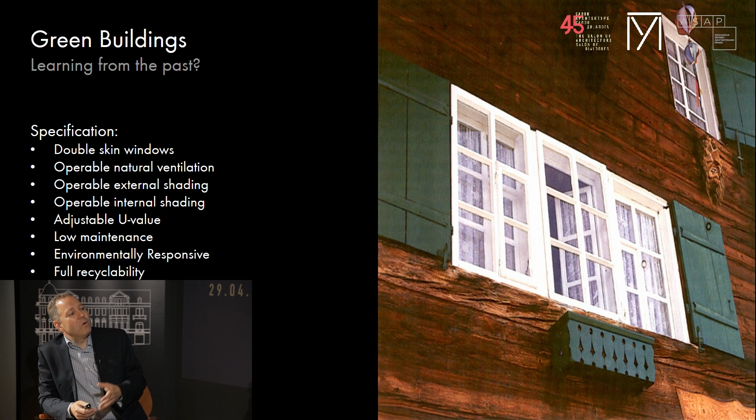You have low maintenance, relatively simple technology. It is environmentally responsive - it's all made of wood and simple glass. Almost full recyclability, at least of the metal parts, and biodegradable in terms of the wood. So if you put this specification down for a modern facade system, a lot of contractors would fail.

So it's a bit of a question - can we pick things, can we learn from the past? Also looking into the CO2 emissions from such a building - usually they had a kind of barn, or animals, usually in the basement or ground floor, then the living rooms or bedrooms above. So the heat from the animals, the cows, pigs, whatever they had, was going up - so it was natural heating. They were very smart in positioning - where's the barn, where are the people?

Now this whole building was run with one single stove in the center, so people were sitting around the stove. They just had one fire heating up, or more or less heating up - I mean, still not the thermal comfort that we would have nowadays. But this building was so environmentally friendly, I think nowadays we would struggle achieving that.

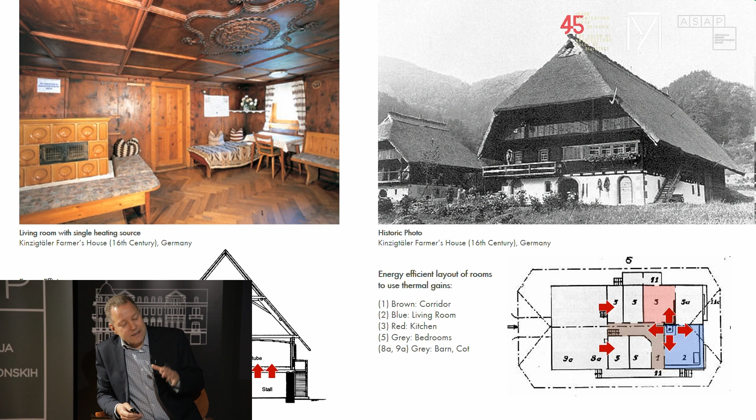Going from cold climates like Central Europe to hot climates, what did people do there in the past? Very similar approaches - it was about understanding nature, understanding physics. What can we do to enhance the thermal comfort of human beings? And this is quite key also for nowadays design - if we want to make things better, we need to understand how the human being works.

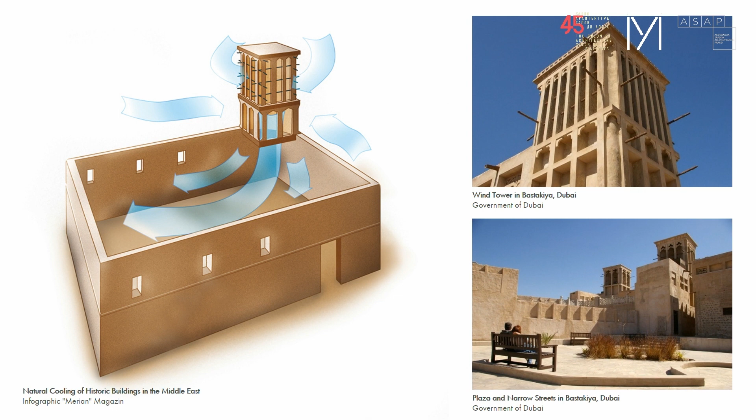And this is an example of the traditional wind towers that were built in the Middle East. During the summer it is extremely hot, so you're trying to harvest the wind, collecting it from a higher altitude, bringing it down into the traditional arabic courtyard, and this wind flow makes it at least a little bit more comfortable in terms of thermal comfort of the people. So low tech, built centuries ago.

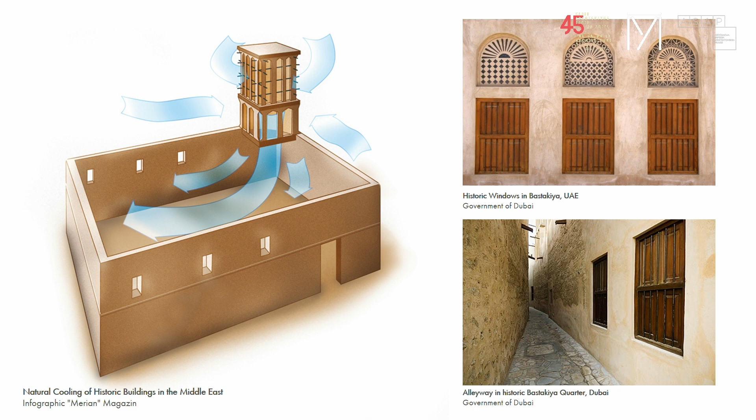Then also about shading - they didn't have glass in the past, so they did this kind of so-called mashrabiyah screens. These provided privacy and let air go through the screen, continuing this idea of wind flow. In the old Arabic cities, buildings were built very close next to each other so the pathways were shaded. It's also showing that people in the past had an understanding of how they can make the world a more comfortable environment.

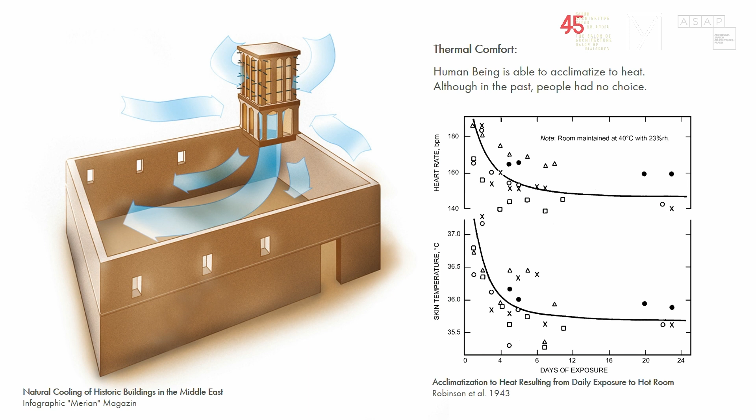There were some old local people from Saudi Arabia standing up and saying, oh, this sustainability, air conditioning is all modern, we didn't have it in the past. So people survived without air conditioning in hot climates in the past. How did it work? Nowadays people would complain immediately.

This kind of graph shows people were put by the US Army into a climate chamber, a big room, and the room was actually heated up. You can see on the left-hand side this is the skin temperature and the heart rate, and then the days of exposure. You can see that the first 4 to 6 days, people were stressed out - the heart rate was high, you were sweating.

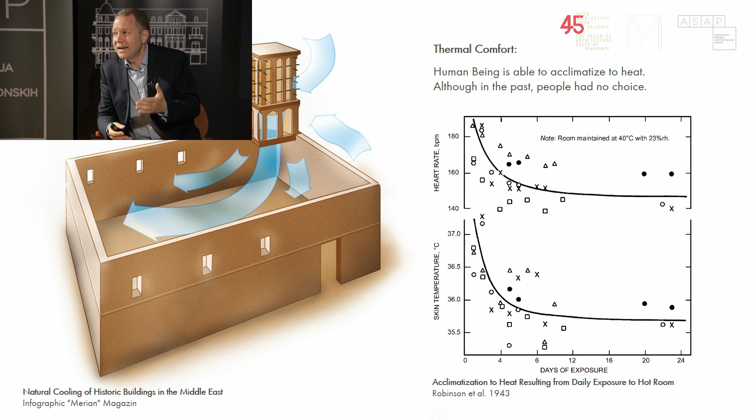But then human beings are able to acclimatize - your human body acclimatizes to high temperatures, the same also for cold temperatures. This is how people survived in the past, because you just have to pass through 4 to 6 days, and then your thermal comfort is getting better. But nowadays people are no longer willing to do it - people are sweating immediately.

Air conditioning in your car - you drive your car, oh it's hot, air conditioning, it's too cold, switch the heating on. So people in the past were more willing, or more used to withstand heat or cold, and this is quite important to understand. So we as human beings, we could go back to these kind of designs, but do we want to? This is another question, a bit more about our society.

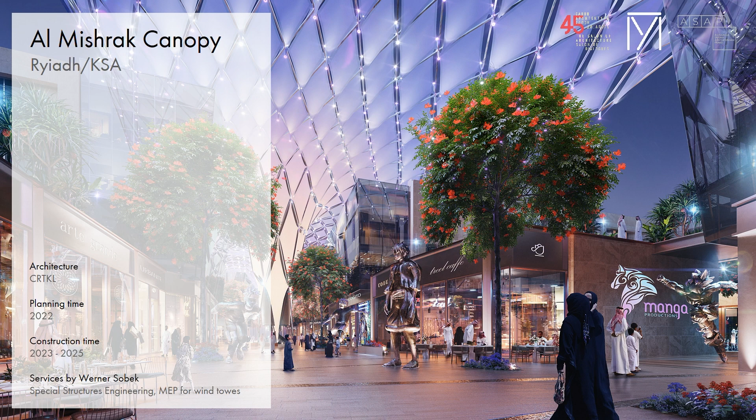Taking the steps further, learning from the old traditions - this is a project in Riyadh that we just finished the design on. In Saudi Arabia we see a lot of movements nowadays, building a lot of new houses, new cities, because the population is quickly growing. Now in these hot climates we try to achieve a more comfortable outdoor climate. This design involves a huge shading canopy with integrated wind towers to create an outdoor thermal comfort so that people can walk along the streets, even in the summer, more or less comfortably.

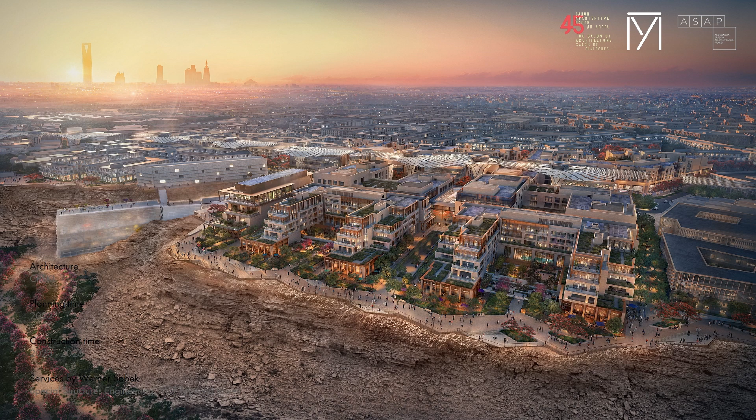You can see this whole design, so there's a complete new kind of city, or kind of half of a city that's built. Between the buildings, between all of the retail shops, houses and so on, we want to go away from this car society, because currently in the Middle East everybody's driving a car because it's hot. But if we achieve that, we're getting the buildings closer again, so that you don't need cars, and people are able to walk outdoors in a thermal environment that is comfortable, even in the summer, with less sweating - then we achieved quite a lot.

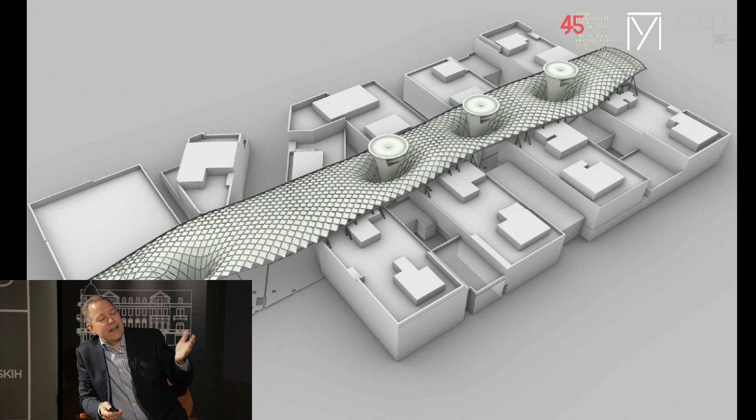So this design involves wind towers which are cantilevering out from the ground, getting wider at the top, collecting the wind from the two main wind directions and funneling this wind down. At the same time we have this kind of shading canopy to provide shading. In terms of design, we designed this kind of big grid shell structure between the buildings, supported on the buildings.

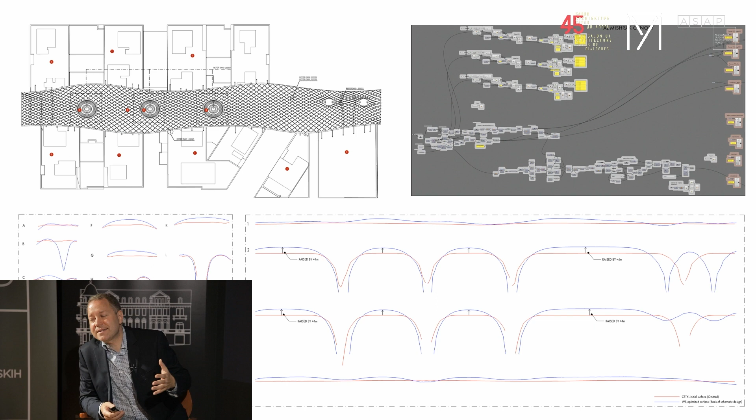Going to the next slide, it shows a bit of the technical complexity behind these kinds of things. If we do design nowadays, especially for so-called freeform structures or these kinds of shapes, we optimize them first architecturally - the architect has to say how the geometry looks. But then we also want to build an ideal grid shell structure, ideal arches, so we modify the geometry for structurally optimized geometry. All of this is run in parametric scripts, so we're fully working in Grasshopper with Rhino, because otherwise you cannot design these structures in 2D.

We call this approach CAD to CAM, computer-aided design to computer-aided manufacturing. This involves that nowadays we even pass on the 3D models from the designers, the architects, the consultants, to the contractor.

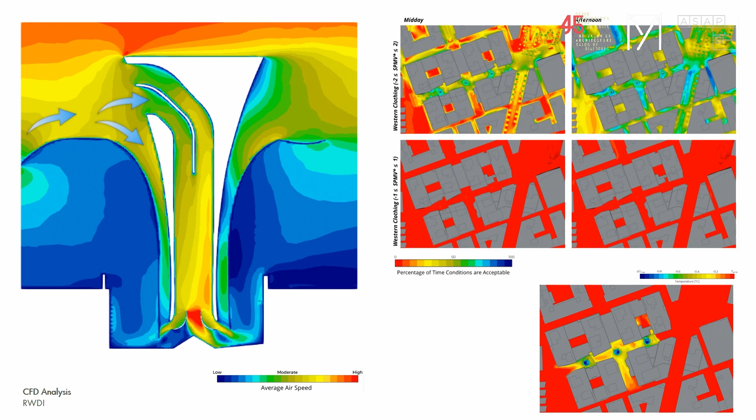Now, I was talking about the wind towers, and what people in the past were able to assess by simple things, just putting the finger in the air to know the main wind direction is from this side, usually from the sea. Nowadays, we have to use so-called CFD analysis, computational fluid dynamics. These wind towers have two openings, collecting air from the main wind direction and funneling it down. The red areas are areas of high wind velocity. On the right-hand side, you can see the percentage of time when exterior environment conditions are acceptable to human beings. We did certain studies with the help of a CFD consultant to see at which times of year we are enhancing the outdoor thermal climate.

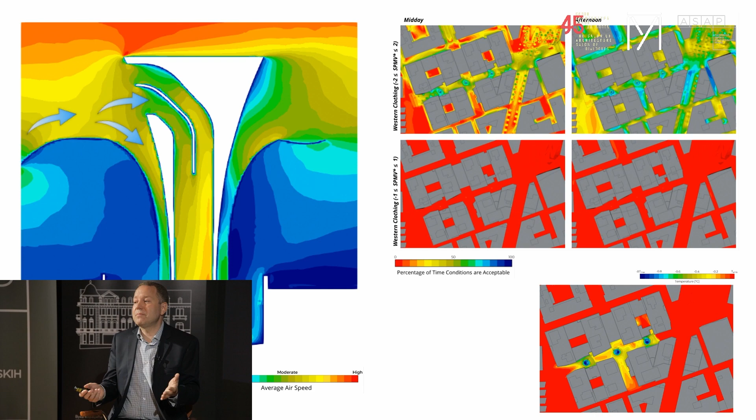You have to be realistic. You cannot achieve that the whole summer in the Middle East gets nice with these kinds of things, but we are actually enhancing it.

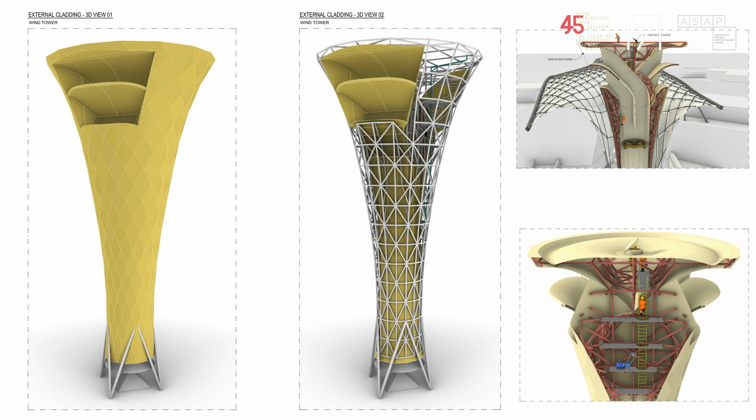At the same time, we have water spray systems included in these wind towers, using so-called evaporative cooling. We spray water mists into the airflow, and the natural effect of this evaporation cools the air down. It also slightly increases the humidity levels of the air, but it's working.

This project shows a bit of the whole design. In the middle, this is the MEP system of the air fans, the air intake, the air exhaust. At the top right corner, this is a kind of rotating drum. As I mentioned, we know two main wind directions, and when the other direction comes, we have to rotate the drum.

This involves that we need to scratch our head because all of this is unique - no one built it before. This is where we as a structural engineering team step in, take on the challenge, and design these unique things. We designed all of the mechanical parts, this rotating drum, the mechanical equipment, the steel structure, so that we were able to pass on the full design to a contractor to build it.

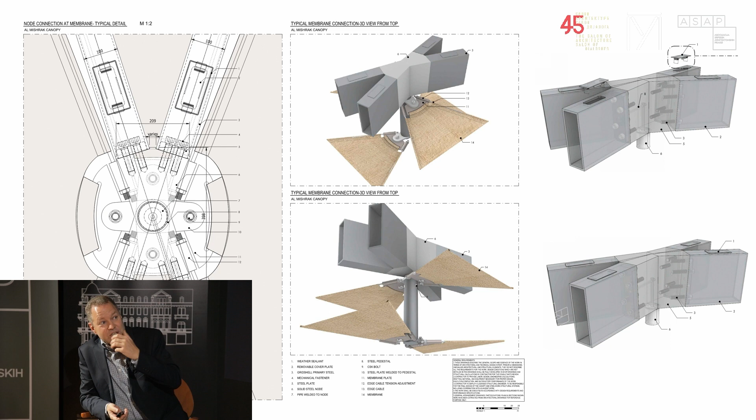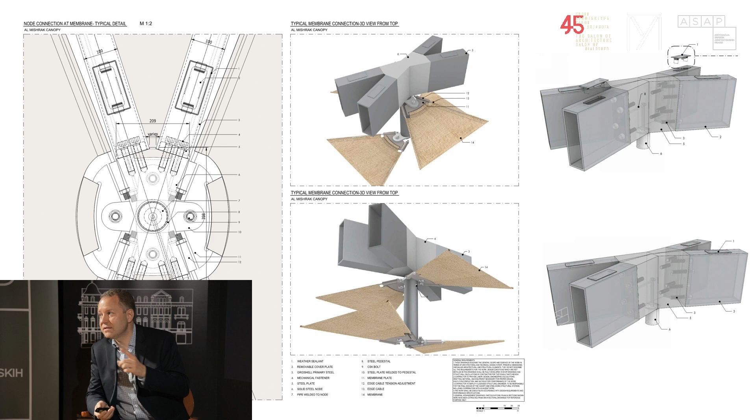Talking about the shading, as I mentioned, it's a shading structure. Usually our grid shells need to be lightweight because we're talking about big structural spans. This grid shell has a span of over 60 meters, clear span, realized with a steel box section of 300 millimeter height. So the span to structural height ratio is amazing, but to achieve this, we need to be efficient.

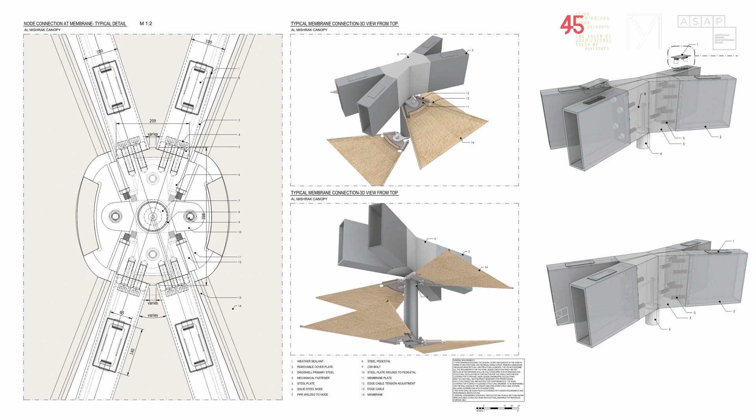We need to be efficient first in terms of weight of the materials, and the most efficient materials are tensile structures. So we used fabric, stretched fabrics, tensile cables to achieve the shading. At the same time, we optimized the geometry to achieve a perfect arch, which was already done by the Romans. We then designed a so-called grid shell system with nodal points that take on all of the different angles, which are CNC machined - you can see it on the right-hand side, showing one of these typical nodal points of the grid shell structure. This is then all bolted together.

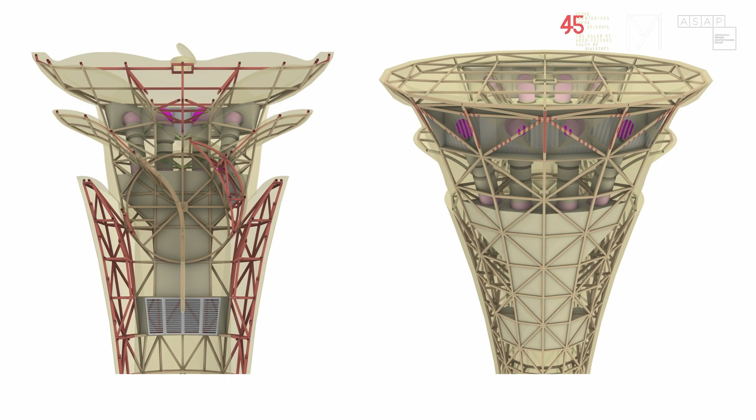These kinds of systems, for us, are a step forward. We're combining old design ideas with very modern technology, doing it at a bigger scale, and trying to enhance the world, make it a better place for people to live. If they want to walk out in May or June in summer, it's still a nice climate, or more or less, and people can sit outside.

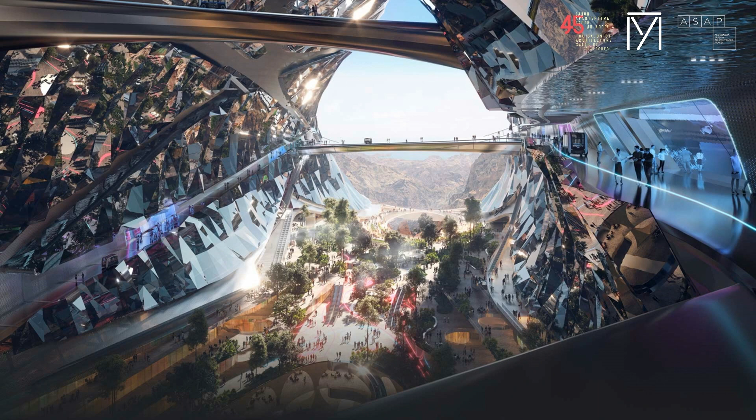Talking about Middle East projects brings me to my next project. We're currently the facade consultant on the Neom Trojena Vault project. A lot of you might know the Neom development in KSA, Saudi Arabia, a fast developing country with a growing population. This Neom Trojena Vault is a project at 2,000 meters height, and we're currently involved in this so-called Vault project.

The Neom Trojena development is on top of the mountains. They were winning the Asian Winter Games, so they're going to host winter games in this area. They also have snow for certain days, so it gets cold there.

The background is the following: this is intended as a kind of destination. As I mentioned, during summer it's quite hot, but at 2,000 meters height it's about 10 to 15 degrees less because of the elevation. So just by the location, you're achieving better outdoor thermal comfort, and you also require less cooling load because you're 10 to 15 degrees cooler than at sea level.

Now the whole design for the Vault includes building almost half of a city into a mountain. Usually mountains give some thermal mass—it's a bit similar to sitting inside a very old building, like an old church, where the walls are like 2 meters thick. During summer it still feels cold because of this big thermal mass. It's a similar approach here, where the mountain helps cool down the interior space.

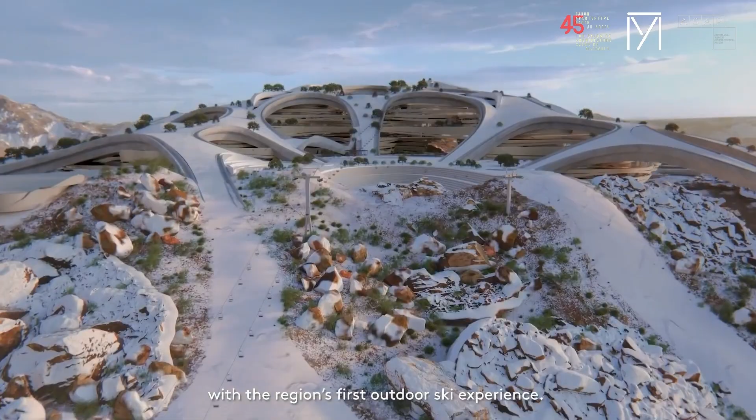Journey to new heights, a unique global destination driven by cutting-edge technology in Neom. This is Trojena. Breathtaking architecture and innovative engineering fold seamlessly into the natural landscape, ascending to a vertical village, a portal connecting the digital and the physical. The seasonal climate provides a multitude of high-altitude adventures in the Arabian Peninsula, with the region's first outdoor ski experience. Enjoy the buzz of world-class entertainment, the crisp mountain air, and the world's most advanced health and well-being center, nourishing both body and soul. And as night falls, you can witness the stars as you've never seen them before.

Welcome to Trojena. Now, on these Neom projects, we know architects involved. We're currently involved in this Neom Trojena project. The project itself has extremely high sustainability goals, which is achieved by a multitude of certain measures.

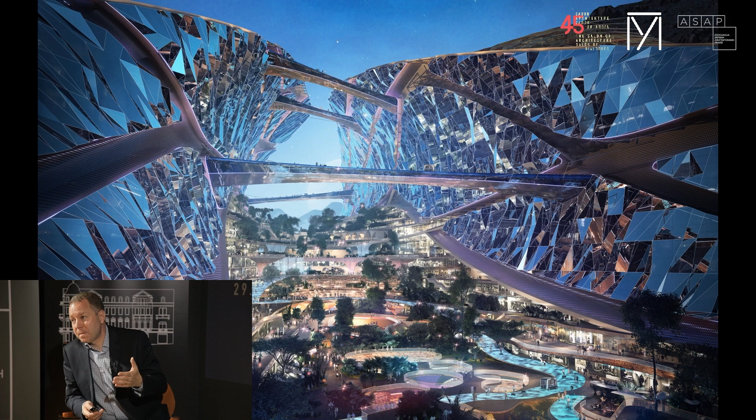Now, this is the so-called vault facade. You can see that our facade curves in from both sides, which on both sides is then facing the rock. At the top, we have a big roof, which is covered partially with PV panels. The central void area already achieves a high degree of shading. We achieve a high degree of natural airflow through this void because it is open at both ends. It's even at the top of a mountain.

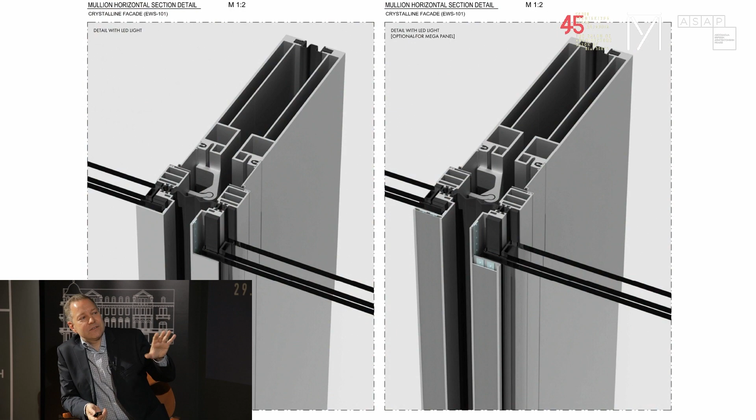This shows a bit of how we go into the details. So this is a typical facade system, which, if you look back to this slide, has a lot of unique different angles. So getting this technically feasible, getting this built, getting the design out, getting contractors bidding for this job is quite a challenge.

Now, as I mentioned before, in terms of the design of this project, it's almost half carved into the mountains. You can see on the left and right hand, we see the mountains. We then see so-called back of house, it even includes gardens. There's a goal that we include gardens, that we harvest crops over there, with some salad, lettuce intentions there. And the rocks by themselves emit cold because it's a big, big thermal mass.

Then the roof itself provides shading, but also includes PV panels, or photovoltaic panels. So we want to generate a certain percentage of the electrical demand by ourselves within this kind of building.

The vault project will be the main transportation hub for the Trojena development. So all of the cars will go there. There's a tunnel going to this building. And there's a kind of pathway down to the lake, which is also green and so on. It's quite a unique, quite a stunning project.

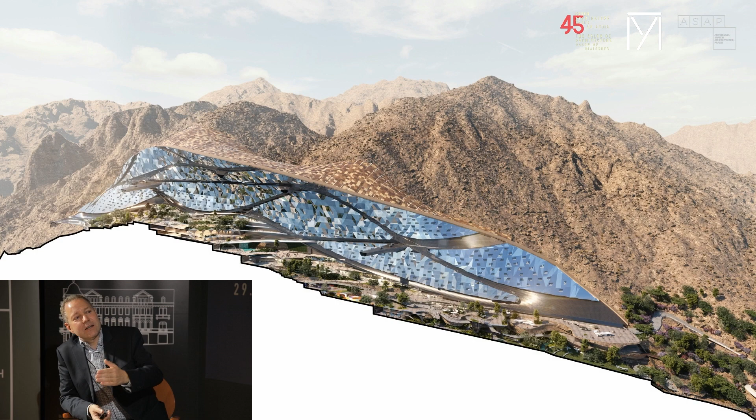This is now a longitudinal section through the project. You can see the kind of scale. It is massive. So from the top, the project is actually intended to mimic the rock so that the architectural impact, the visual impact, is less.

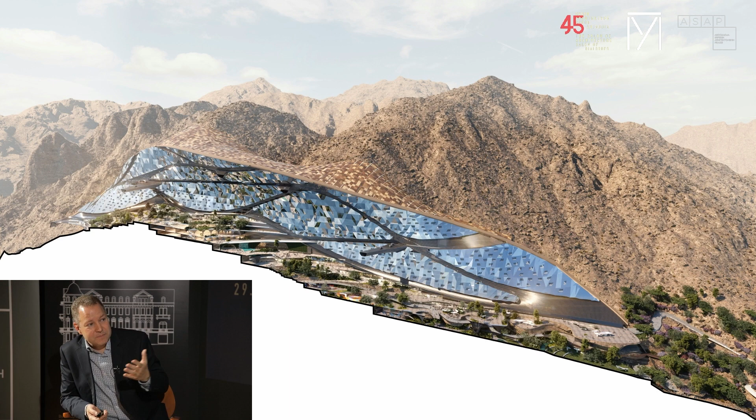It shows, how shall I put it, new ideas of how we can develop more sustainable cities. And it's not starting with small steps, it's starting with big steps. We are starting doing something completely different. For example, carving half a city into a mountain.

Okay, another project currently in the press, called the Mukaab in Riyadh, another landmark project in Saudi Arabia. The intention is to build a 400 by 400 by 400 meter cube, a box. It will be the world's biggest building, even bigger than the Pentagon. The idea is that inside this 400 by 400 by 400 meter box building, we're building another building, a kind of tower, which is 330 meters in height. Around this interior tower, there's a plan to have the world's biggest video projection area.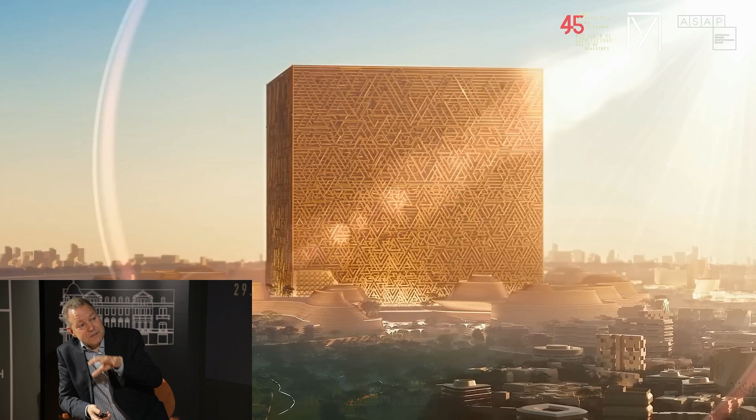Now, the whole development is the center point of a whole new city development called the Mukaab. The project itself is also one of these completely new ideas. In the end, if we talk about sustainability, how can we design a sustainable building, both in hot and cold climates? It starts with very simple things.

It starts with the A-to-V ratio, we call it. So what is the external surface area, the building envelope? For example, if you take this as a box, we have the sides, the top - that's the kind of envelope. And then we have the volume of the building. A building is more efficient the better the A-to-V value is. For example, the best shape is a ball, or a circle, a kind of box building.

But if you build a flat building, it's usually pretty bad, because you need to cool down this interior space. And the less surface area you have, the less facade and roof area you have, the easier it is, because the facade and roof have a poor U value. So all of the heat gain or heat loss is through your building envelope. And if you minimize the building envelope area compared to the volume of the building, then it gets efficient. That's why a single-story building is usually not efficient - you want to put some floors on top, because then you get a box which is more efficient.

It's a similar idea here. We're creating a massive interior volume, which means we also need to cool it down less because the solar heat gain is less, and the surface area of the building envelope where heat loss or heat gain takes place is also less.

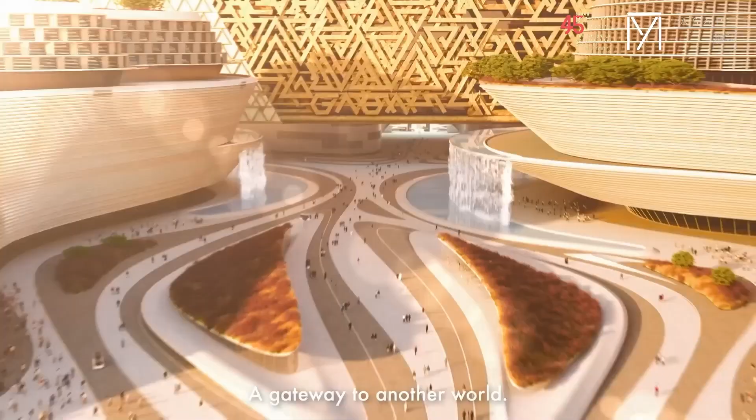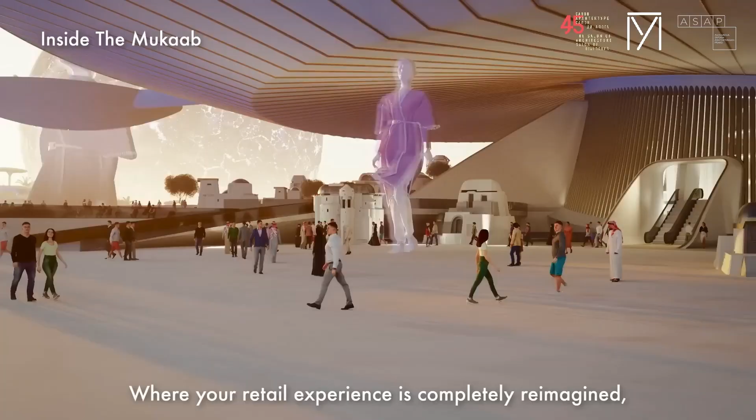Step inside and it's unlike anything you've ever seen, at a scale that's unprecedented, big enough to hold 20 Empire State Buildings. Where you and those around you enter a new reality, transporting you to Mars one day and magical worlds the next. Where your retail experience is completely reimagined, and hospitality, leisure, and entertainment reach new levels, all in breathtaking, ever-changing environments. This is the new face of Riyadh. Experience a new horizon.

So let me go back one slide to explain the technical challenges here. First of all, we're building a structure made of 4 corner towers, which are already 400 meters in height. We're then building a big roof on top, which includes, I think, a car racetrack.

We then have one facade on the exterior skin with a mashrabiya to provide shading. We then have the inner skin, which is the video projection area, which of course has to be almost seamless. It's a question of how we support it and what it's made of. Most likely it's a membrane structure. So there's a lot of questions, a lot of new design approaches we have to take for these kinds of projects. It's quite challenging.

We're going to see how it develops. Now going on to some projects currently on site, we're currently the lead consultant for the Wasl Tower in Dubai.

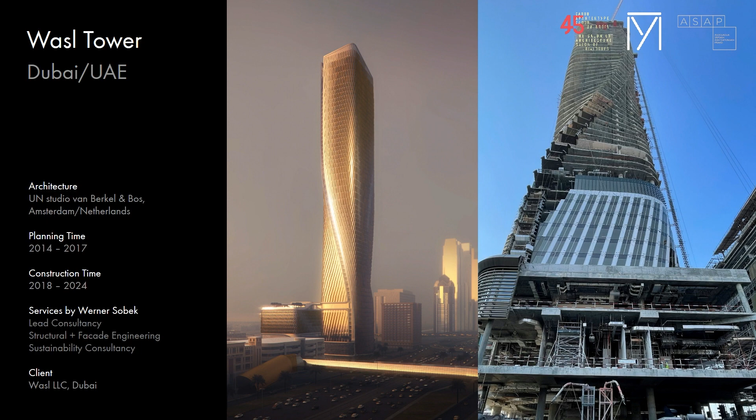So coming to a bit more traditional design, this tower is going to be the world's tallest tower using a ceramic facade, including terracotta. Terracotta is a very old traditional material, like porcelain, invented by the Chinese ages ago, and this is going to be the cladding for the exterior sunshade elements on this tower.

Talking about the challenges, this is one of our first projects fully developed in 3D together with the architects from UN Studio. We spent a lot of time designing the right amount of exterior solar shading in combination with the glass, which has a solar control coating. It's a combination of measures to reduce the solar heat gain, which is the main factor in cooling loads in the Middle East.

I want to go on to some other projects from the last years. We've been the lead consultant for all of the shading structures for Expo 2020 in Dubai. We were the engineers but also the architects for these retractable shades, the so-called flying bird shades, and also for some green, natural plant shading.

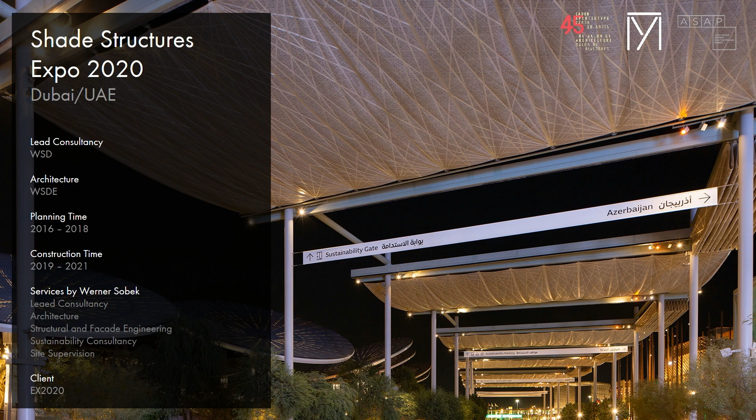As I said, a similar idea to our project in Riyadh but with a different approach. For the Expo, you have a lot of these pavilion buildings and people walk between them, so it was a major task to create a comfortable outdoor thermal environment for people walking between the pavilions. At the same time, there was a clear intention by the client that during night times you want to see the stars, so we had to design something active, where the shading can be open or closed.

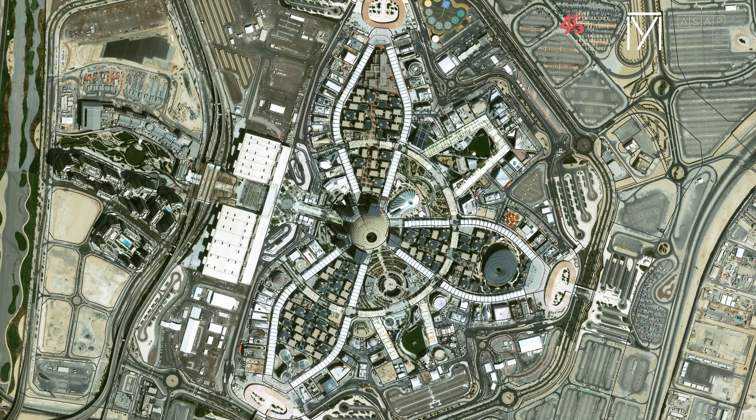This is the design we came up with. You can see the scale here - the white areas are all the shading membranes, and all of the dots are the buildings. It's a massive scale, a huge development - it's an expo. All of the shades are retractable, so during night times they were closed or partially opened with lights on.

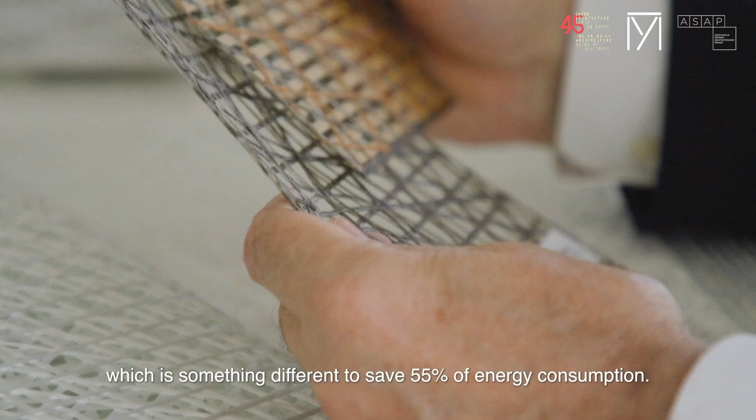In terms of the design of these, I have one video from Professor Werner Sobek, on how we have to reduce emissions dramatically. The announcement is to reduce CO2 and greenhouse gas emissions within 10 years by 55%, which is different from saving 55% of energy consumption - this is even more difficult to achieve.

Everyone underwrites that, but nobody really makes clear to himself what that means. Because if we are not capable to change the technologies we use to produce the materials, to build the buildings, to run the buildings, and to demolish them, then in 10 years we are allowed to build only 45% of the amount we are actually building. That means half of us would become unemployed.

Standing in front of a problem which says either you change everything or you cannot build in the way you build nowadays will urge this interdisciplinary process, where people start talking to each other and say either we invent something or we are lost.

Now, talking about sustainability is also about the amount of material that we use. To create shading, for example, you can do this as a concrete slab. But what's much more efficient is to minimize the design, take a minimalistic approach, and save material. These shading fabrics are only 2 or 3 millimeters thin, so in terms of material used and weight, it's almost nothing.

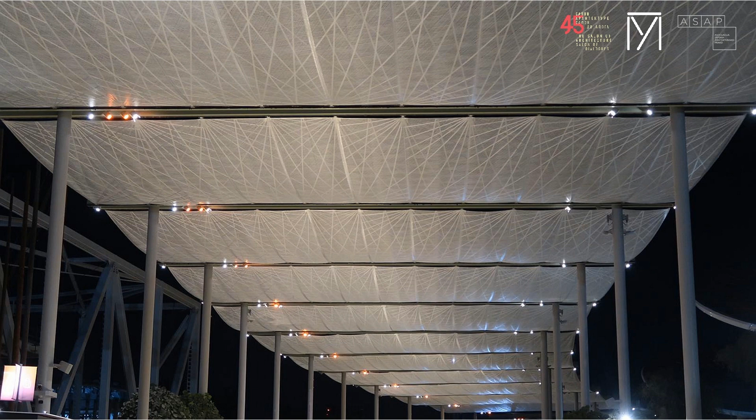At the same time, what you can see here is the orientation of the fibers. And this is now the closed position. Talking about the orientation of these fibers, we collaborated with a company in Italy on the design of these fabrics.

We have the main points where the fabrics hang from the steel frame on tracks. These points are the points of stress concentration, and we orientate the fibers in a direction toward the next support point. So we're designing a fabric that is perfectly designed for minimalistic material, and at the same time it gets an architectural quality because we are visualizing the main stress directions, which a lot of people say looks good. I'm not an architect, but hopefully a lot of you will share my point of view.

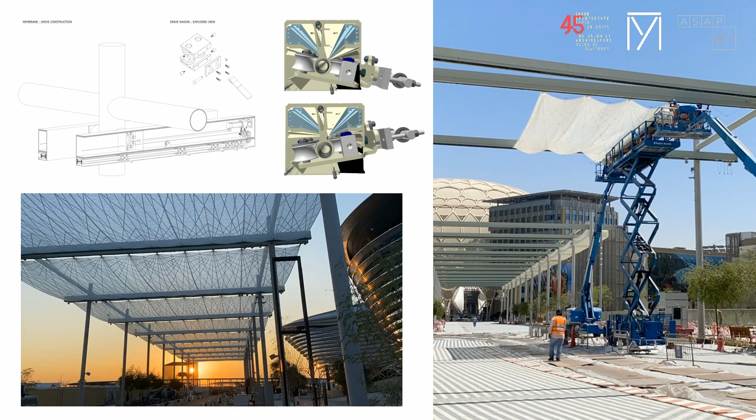Now, going on about the technology, of course we had to design all of the tracks, all of the mechanical equipment, all the motors, the rails, the gear, and so on.

The expo took a bit longer than expected because of COVID. It started late and ran longer, and these fabrics are still in operation nowadays. They were designed as a temporary structure, but now they've been running for almost 3 years. We're quite happy with the project, it worked out really well, and people tend to like it.

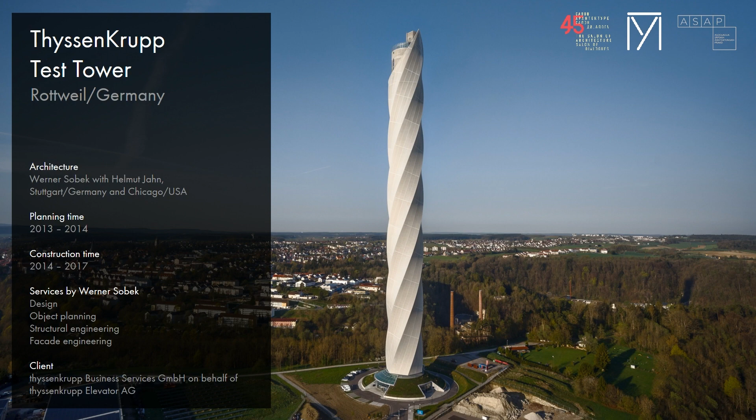Now, talking about fabrics itself, this is maybe a bit of a future trend we see, that we will build more with lightweight, translucent materials in the future. Why? Because we want to save material, we want to go to new shapes. Architecture is moving toward more complex curved geometries. If we want to create curved geometries with traditional materials like flat aluminum panels or concrete, it's really difficult. Fabrics, you can easily stretch in the way you want.

So this is the ThyssenKrupp Test Tower, an elevator test tower, which is the world's tallest fabric facade built so far.

In the end, it's quite a boring building because it's just a concrete core with test elevators, and we had to clad it in a nice way. Otherwise, I think the local government wouldn't have accepted this tower.

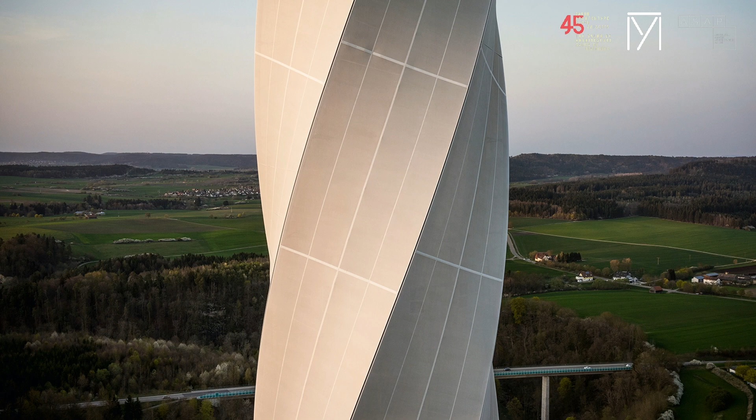But it shows a bit of the beauty of this material. In the summer and winter, it picks up the light, picks up the shadow. It's even translucent, so if you look against the sun, you can see through the fabric. This whole design with fabrics is amazing because it gives you the opportunity to create something that's translucent and could also be permeable. The whole idea of permeable systems—systems that let air pass through, provide shading, provide privacy—ideally also has a certain thermal performance.

This slide shows some research, because we are closely collaborating with the University of Stuttgart, with the ILEK. This is currently a research project by the ILEK. It's about a kind of tilement, I would call it—a lightweight facade system which uses microfibers in a kind of mesh with a certain density.

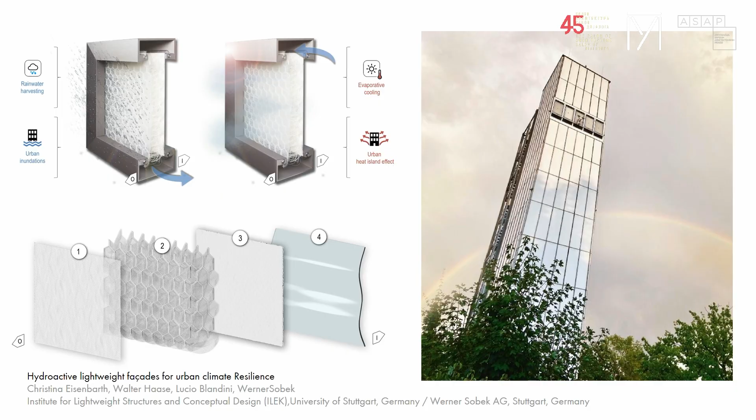Then you spray water, or let water run through the small fibers from top to bottom. At the same time, if there's strong rain, the system can harvest the rain. So there are different layers of the system, and the next slide shows the main principle.

This system is a bit similar to what I showed previously with the Al-Mishra canopy in Riyadh, with the wind towers where I had a water spray system. It's about evaporative cooling—using just water to cool air down. It's a similar kind of system, but we're not using a mechanical system, just water which runs down on these microfibers.

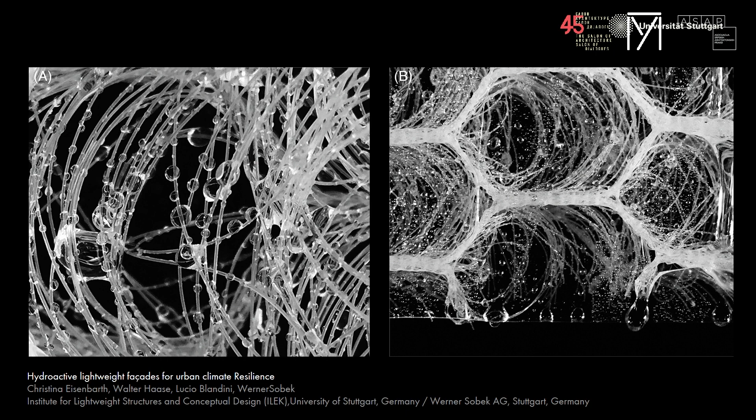This is a close-up micro photo of these microfibers. They're extremely small. The tiny water drops start sticking to these microfibers, so you let the water run onto them and they easily evaporate into the air. You're getting evaporative cooling by the natural airflow through this open material.

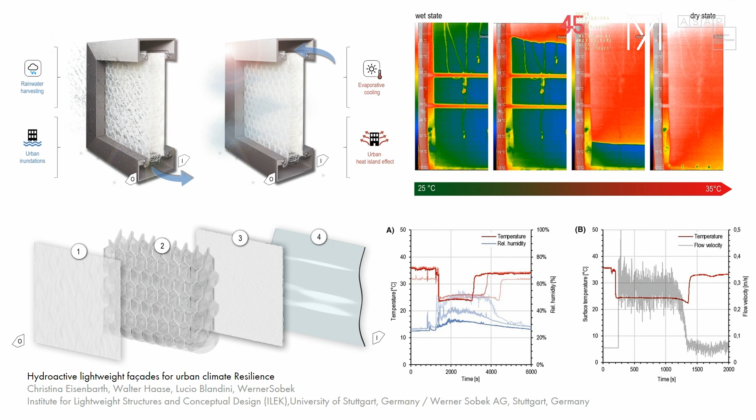You can see that we're able to cool down the air by about 10 degrees Celsius with this relatively simple system, just using water and natural airflow—no electricity, no compressor, no mechanical system, quite simple. This is a way forward. Our future might be a combination of very complex systems, as on NEOM, but also maybe very simplistic systems like these. It's about getting the ideas out there, doing the testing. All of this starts with understanding the physical principles, understanding how we can make this world more comfortable for human beings, and how a human being works.

This brings me to my next topic, which I'm currently researching quite a lot: human-centric design. Most of the slides I've shown before were human-centric, but now it's about light. This is a photo from 1920 in the UK, where babies were put out in the sun. Why did they put babies in the sun? Because they figured out that if a human being lacks daylight, they get sick.

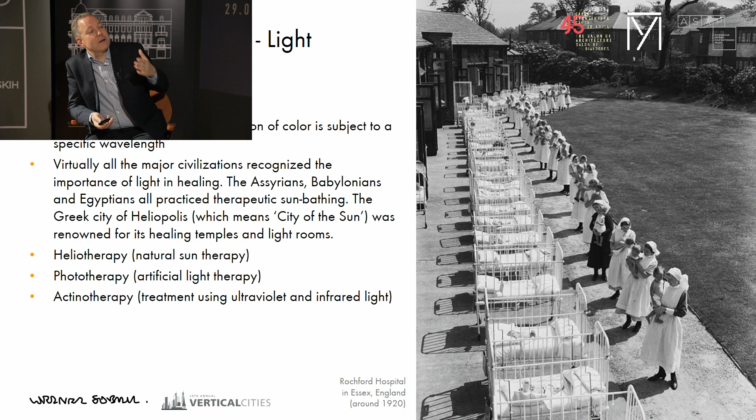And light—there's a lot of things about light: natural sunlight, artificial light, treated with ultraviolet light. I'm going to go through this relatively quickly, and I'll explain later how this relates to architecture and to facades.

This is quite an important topic that we have to understand when we're talking about facade systems and buildings.

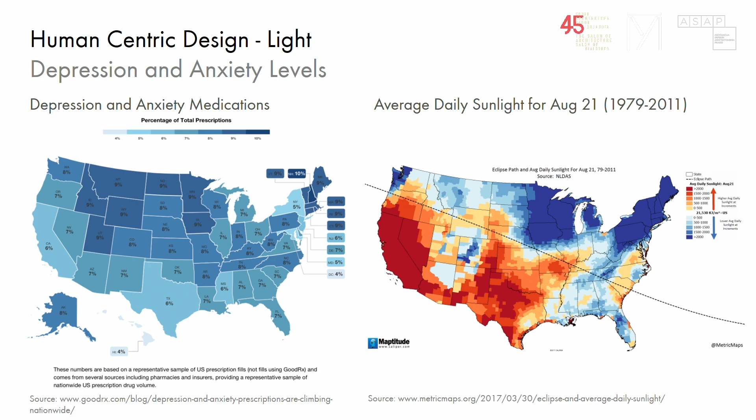On the right-hand side, we see a map with the sunlight exposure for a day in August. You can see that again, California and Texas are the states with the highest amount of sunlight. So there's a clear correlation between sunlight and depression. This is quite interesting. It doesn't mean that we all need to move to Spain or some very sunny country or Dubai, but it gives us a kind of question mark about what we do.

We are all architects or building designers and engineers, and we're designing buildings, but we need to design the building for the human beings. And we as human beings are different to what the human being has been in the past. Now we human beings, all of us, we became an indoor species. We are an indoor species, spending 87% of our time indoors, inside buildings, about 6% in vehicles, and only 7% really exposed outside.

So on the right-hand side, the graph shows that we're only 13%, including sitting in cars, outside. Then about 60% of our time we're inside buildings, exposed to natural sunlight coming through glass, coming through our windows.

28% of our time we're exposed to artificial light from light bulbs. This shows the importance of the whole topic, especially since COVID, the world is getting more depressive. So what do we need to consider?

Human beings evolved over millions of years under the exposure of the full solar spectrum of the sun. Then for artificial light, human beings started with candles. I know it's not really about architecture, but I'll close the circle later on how it comes back to the architecture we do nowadays. On the left-hand side, before about 1960, it was mainly light coming through windows.

On the right-hand side, we see the transmittance through glass panels - what is the spectral transmittance through the glass that we had? This is a very hot current research topic. Even we at Sobek currently collaborate with a company called Guardian Glass on developing coatings on glass that are sustainable, but also take into account what we need as a human being, what kind of spectral data, what kind of light we need.

Let's go through this quickly. The glass in the past was just very simple clear glass. At the very top, you see the sun's spectral emittance - what the sun sends out. There's a peak in the visible spectrum between 380 and about 780 nanometer wavelength, which is what the human eye can see. Why can we see this? Because this is the peak of the spectrum that the sun emits, and our human eyes evolved to be most sensitive in this spectrum because this is the maximum the sun gives us. The human being adapted to the sun.

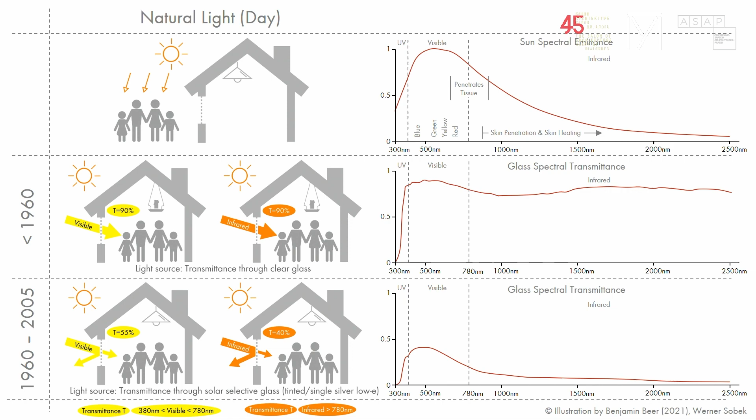Now, is the glass adapting to the sun as we did as a human being? This is a question mark. Simple clear glass in the past had a more or less horizontal, constant transmittance of the whole solar spectrum, including the long wave infrared heat. When so-called solar control coatings were developed, these coatings get the U-value down or get the solar heat gain down by reflecting the long wave infrared radiation back to the outside, which you can see in the bottom right corner - the infrared transmittance is pushed down.

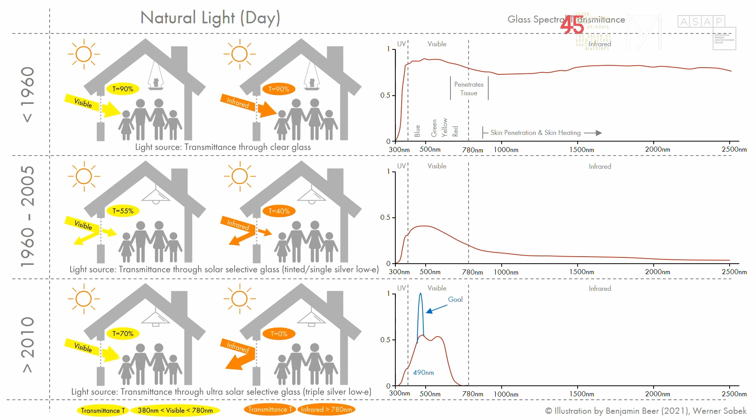Going on through the evolution of coatings - from single silver, double silver, to the very modern triple silver coatings we have nowadays - our glass now transmits only the spectrum of the solar radiation that's visible to the human eye. Everything on the left-hand side, the ultraviolet, and everything on the right-hand side, the long-wave radiant heat, is completely filtered out. So as human beings, through modern glass panels, we're no longer getting natural daylight, it's filtered daylight. We can't even notice it because it's outside our visible spectrum. This is quite important to note.

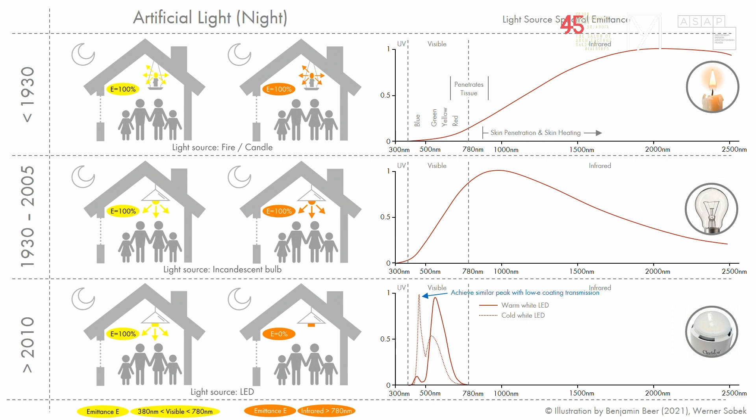Maybe stay with the slide. What shows you what kind of light do we get? We are spending 87% of our time indoors. But what kind of light do we get? Through our glass, it's filtered light. From our light bulbs, LED, it's also not the full spectrum. What is this doing to us as human beings? We don't know. It's a big experiment.

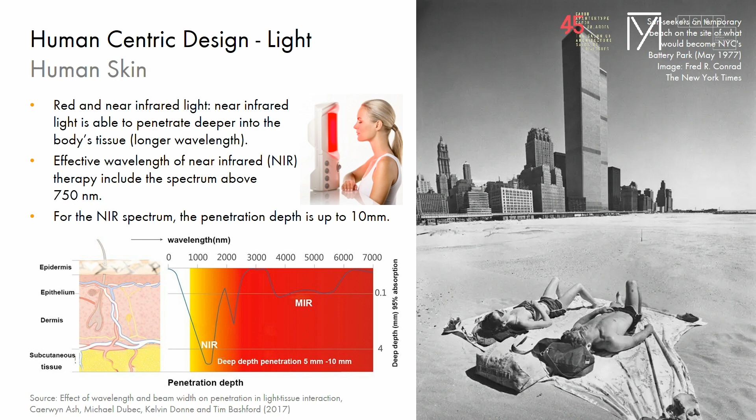Talk about sunbath and the spectrum. Why do people do a sunbath? Would you do a sunbath under LED bulbs? Would it be nice and comfy? No, because you are doing a sunbath because you want to feel the radiant heat, the long-wave infrared radiation. On the bottom left, you see the penetration depth of the wavelength into the human skin, and only the infrared radiation penetrates into the skin. So you feel better after one week in Spain because you're exposing your whole body to this long-wave infrared solar radiation.

Now, going on about light, it's also about vitamin D production. Exposure to light helps your body produce vitamin D.

The latest research in medicine shows, for example, a treatment against cancer with a certain red light spectrum, about 670 nanometer wavelength, onto the skull of your head.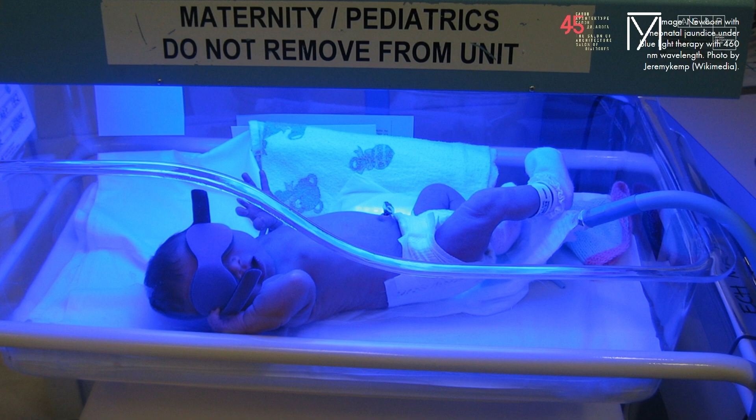Another thing about light brings me from the infrared spectrum to the blue light spectrum. This is currently also the research topic we're doing with Guardian Glass, developing new glass more focused on human beings. This is a newborn baby — maybe a lot of your kids might have had it. The liver of a baby, which is supposed to clean the blood, is not properly working yet in a lot of babies. So these babies are put into a chamber with blue light, 460 nanometer wavelength, which helps the skin do a blood cleaning function. A lot of babies need this blue light for a couple of months, then it's done, the liver takes over and cleans the blood. But it shows the influence light has on our body.

Going on from the light, this is currently a research project with ELAC. It's about light emittance fabric, where we can emit light in the wavelengths that we want. But let me go on talking about the blue light.

This topic is about wanting to wake up in the morning, all of us. How do we wake up? We need light. But what kind of light do we need? We need blue light. The sun on Earth naturally gives a more bluish light in the morning. In the afternoon, close to sunset, the light gets more red, more yellowish. So in the morning we need blue light to wake up, but in the afternoon we should no longer be exposed to blue light, otherwise we won't fall asleep. This is around the 490 nanometer wavelength, which is important for the so-called circadian rhythm of the human being — the day-night rhythm — for which we need this blue light spectrum.

This is also part of the latest research and the draft DIN standard, that we now start classifying glass panels not only for visible light transmittance, but for the so-called melanopic light transmittance. Melanopic is the wavelength range important for the circadian rhythm of the human being, around this 490 nanometer wavelength.

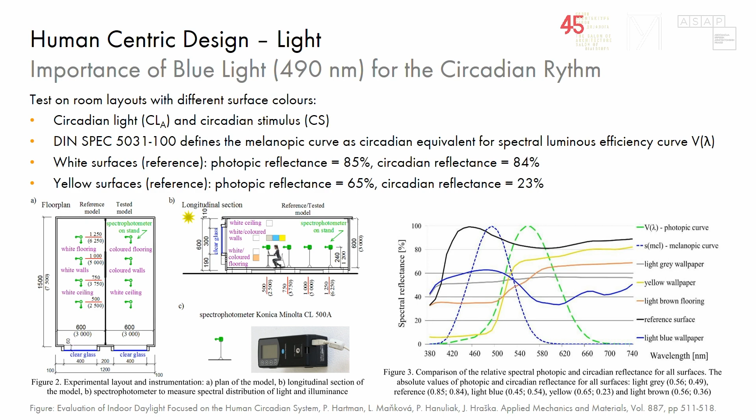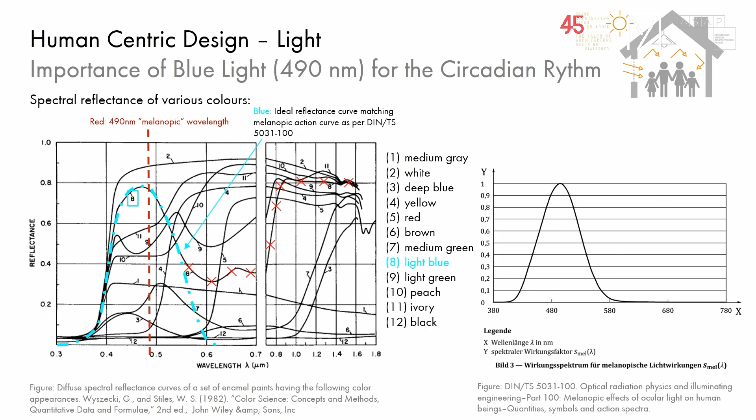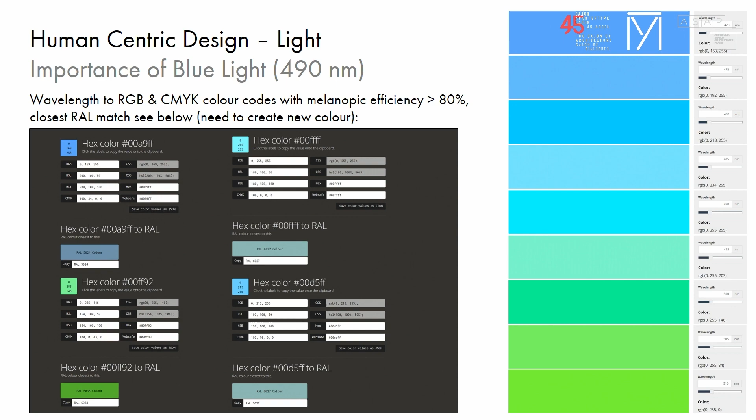Okay, now I want to go further. What kind of colors do we like? So we know we need the light blue, which is about 490 nanometer wavelength. On the right hand side we see the wavelength, and on the left hand side, the color. This 490 nanometer wavelength is a kind of very light blue. If we go a little bit higher, about 10 to 20 nanometers above to about 500 nanometer, this is a light green.

And usually what do people like? If you look out of the window, ideally we see a blue sky, light blue, and we see green plants, green trees. This is what we like. And this goes a bit back to what we want to see, what our eyes perceive.

And this comes also to kind of architecture. This comes to a point where we then said, okay, we like the light blue and the bright green. How does it revolve, or how does it reflect into our cities? And also into the property market.

So this is Central Park, New York. For all of the apartments facing the park with park view, you pay a premium, double or triple the price of non-park view. So this shows that people want to have the vision, they want to see the green, and also the reflectance of this light green is very close to the light blue, what we like, what we need.

And this spins a bit further. So how can we get this park view? Let's go back. We have this park view, and then we have all of the buildings which are gray and white and grayish. And how can we come to a point where we do a more sustainable design or kind of sustainable city development, city design, that we're saying a park is no longer a park, or a building becomes a park?

And this is Kö-Bogen 2 in Düsseldorf, I think currently the world's largest green building or green facade, where in the end we are bringing a park to a building. And it's not only that it's a benefit for the building itself and also for the local microclimate, because it's reducing the local heat island effect in the cities and so on.

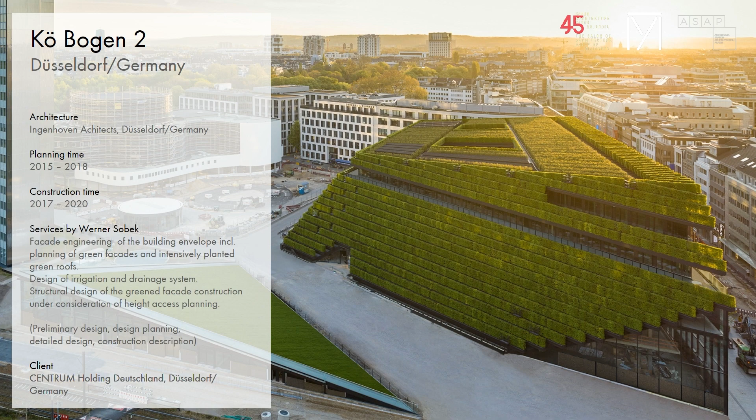Now talking about Kö-Bogen 2, just some technical details.

Of course, we have the plants, which are usually planted in long planter boxes off-site. There's studies with botanical specialists on what kind of plants you use. We did trials. You can see this is a kind of technology.

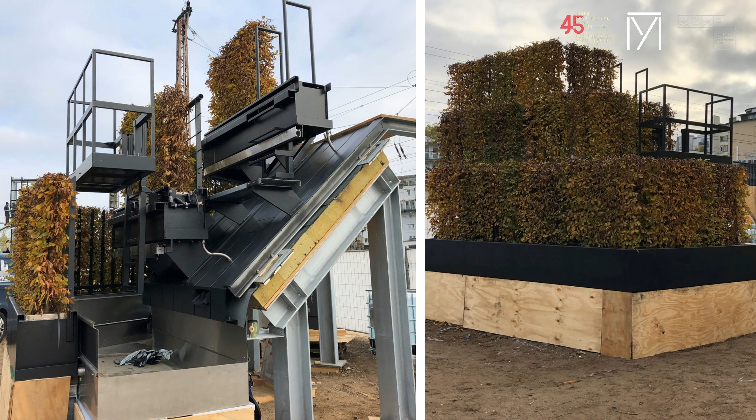It's quite often an opaque roofing system, sometimes including glass panels. We then have the plants, usually bushes. We have a watering system, an irrigation system for water supply, and drainage with stainless steel pipes.

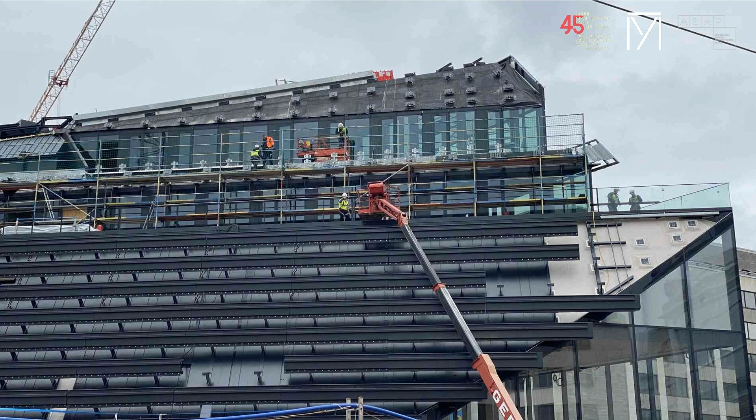Then everything is pre-assembled and comes to site. So these trays are installed on site, and then the plants were craned into position.

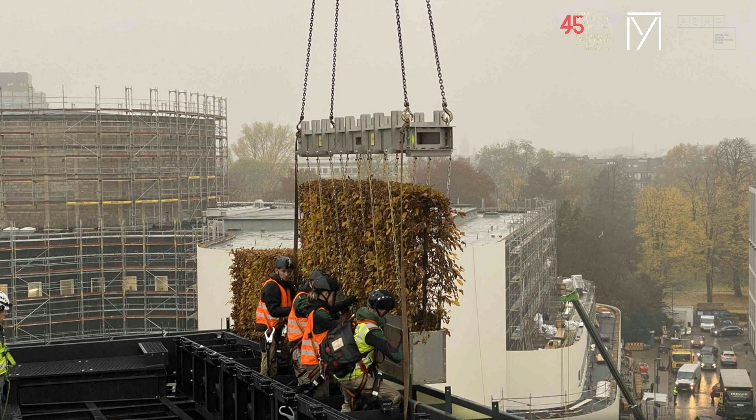On this specific project, the client wanted plants that are not green during the winter. Some plants are green, but this reflects the natural seasons, summer and winter. It got installed and came down, and you can see this is like a park view, but in the end it's a building. I think it's quite a nice approach.

Will all of our buildings look like this? I'm not really sure. In the Middle East, people ask me about this, and it depends on the local climate. This makes sense in Central Europe, we have a lot of water over here. In the Middle East, where there are no natural resources of water, this would not make sense.

In the Middle East, green is usually not really green. If we have, for example, golf courses, it is water taken from the sea via desalination plants, which take a lot of energy. So all of the water used in the Middle East has a high CO2 carbon footprint, whereas in Europe it's not so. For moderate climates like in Europe, this definitely makes sense.

Coming back to light and vision and sustainable design, nowadays sustainability tends to tell us we need to reduce the U value, so thermal performance needs to be enhanced. This is then a bit of a contradiction to designing with glass, with light, and with vision.

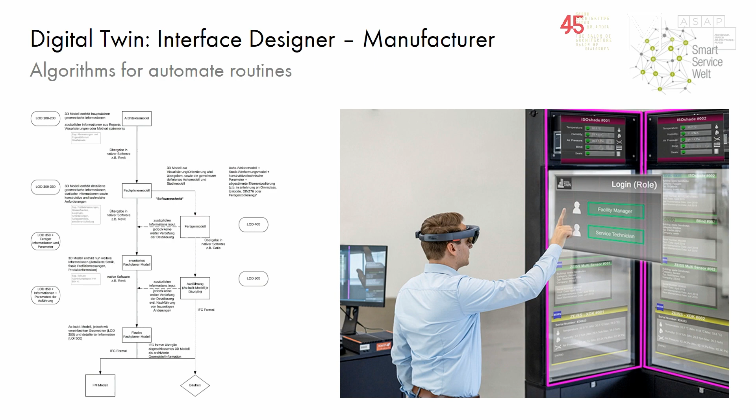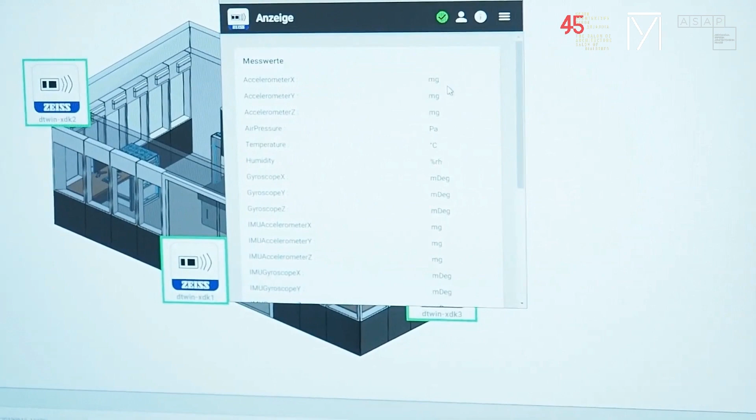We're using VR glasses, because in the end it's about these modern facades, like at Deutsche Post Tower, that are all controlled so the facility management system is getting smarter. First, we're getting active facade systems where the facade can actively react to, for example, sunlight conditions.

If the sunlight hits the facade, put the shading down. This is a system where facility management people can later walk through the building, and each unique facade panel has its own chip. Via VR glasses, the facility manager can log into the facade system and check it in a haptic way with their fingers, for the current performance in terms of solar shading, U value, and can put the blinds down.

You can also check if the system has a malfunction. If there are issues, they can start certain functions. So it's a way that we want modern technology to get easier to use for the tenant and for facility management.

At the top you can see air pressure, humidity levels, and temperature levels. Once the facade system recognizes, for example, a very strong wind, the active flap in the double skin facade would automatically close to prevent high wind going through the open flap. This is a kind of shading system, humidity levels, and so on. So it's a way that we want to control all of these parameters in a more holistic way.

Now, going on, this comes to almost the end of my presentation. I hope I wasn't talking too much. It's about glass again. I've personally been doing a lot of research into glass, about structural glass, thermal performance, and light transmittance of glass. I've been very enthusiastic about solar transmittance and spectral transmittance of glass.

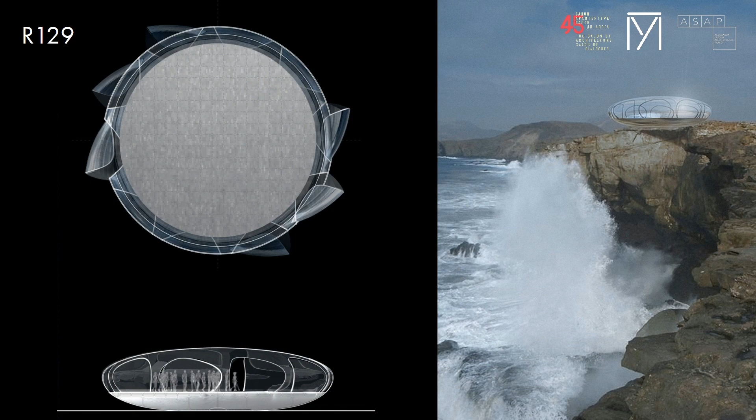This is the R129, a research project that our office ran and is currently running. The idea is that we're building a kind of glass shell, so that in the end we create a kind of monospace, where this monospace lets the border between inside and outside more or less fade. You can see this kind of hull.

However, to make this work, we need to take big steps in technology, which means for this kind of system we're looking into switchable glass. So the glass has to be able to actively respond to different sun conditions. For example, if the sun is out and there's risk of overheating, it needs to go very dark. If there's no sunlight on a dark winter day, it has to be very transmittent, so very open as glass.

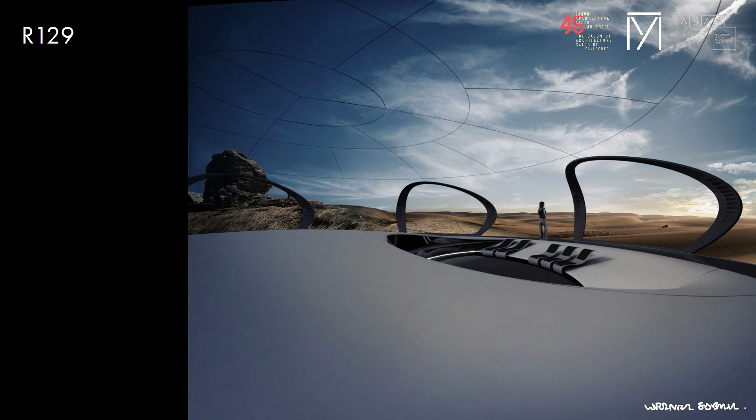We need to be able to filter certain spectra to provide what we need as human beings in the morning, like blue light. At the same time, this glass has to achieve high thermal performance requirements, so it has to be, for example, vacuum glazing to get the U value down. At the same time, it has to have structural performance to resist wind loading and so on. But I think only if we set certain goals, saying this is where we want to be in the future, do we know where we need to work.

This brings me to the end of my presentation. So thanks, everybody. I hope you enjoyed the presentation.

So anybody who was thinking we were going to talk about joining of the facade, it's something different completely. Thank you very much for a very different view of what a facade is and what the future of architecture actually is. Is it sustainability from the nature point of view and CO2, or is it human-centric? Which I would argue is where the future is, because the future will be where the humans are. Correct, yeah. So thank you very much, and I'll open discussion.